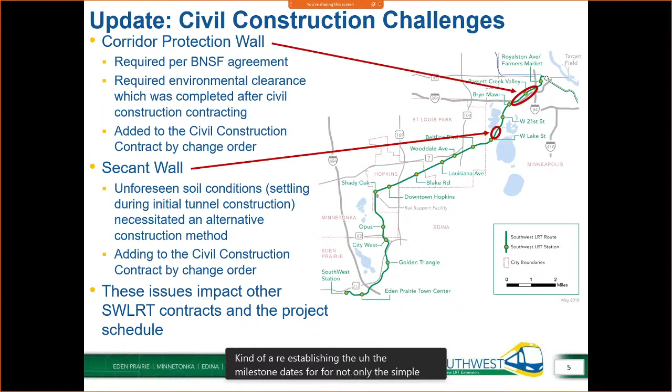So maybe you could advance the next slide there, Jason, slide 6. As I indicated, the corridor protection wall, we have completed a change order that was done earlier this spring, and so that work is underway. I have a photo to show that. And then the secant wall, as I indicated, we're still working on that process.

But associated with the secant wall, we also need to reach agreement with the civil construction contractor on how they're going to resequence the tunnel construction. As you may recall back in February, the secant wall is an integral piece. It's not quite in the middle, but far enough within the tunnel itself, and that tunnel is about a half mile long, so the contractor really needs to resequence how they're going to do this tunnel construction. We still need to resolve that issue, given that we're in a very tight corridor with limited availability to access the construction site.

So as I indicated, we will need to still get through the secant wall and the resequencing, but the bigger lifts we have are we need to reestablish the schedules with the civil contractor and the systems contractors, and get that established before we can then set our sights on a revenue service date.

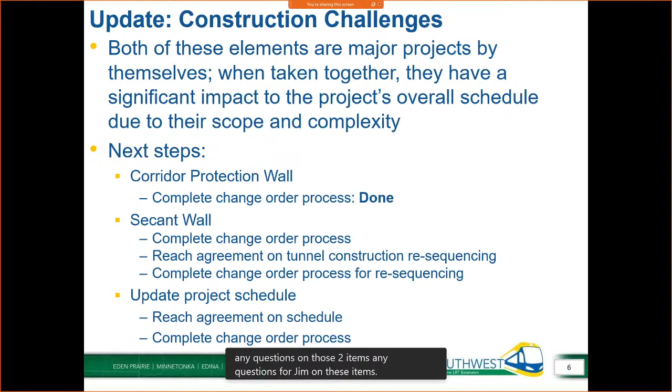So I have a number of slides starting from the west out of Southwest Station. We are making a lot of progress. If you haven't been out there, you might want to go take a look and follow the cranes and the bridges. A lot of stuff happening out there. This is a very complex site out of Southwest Station.

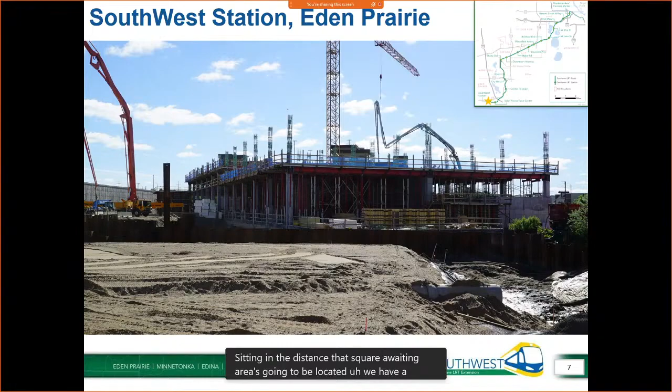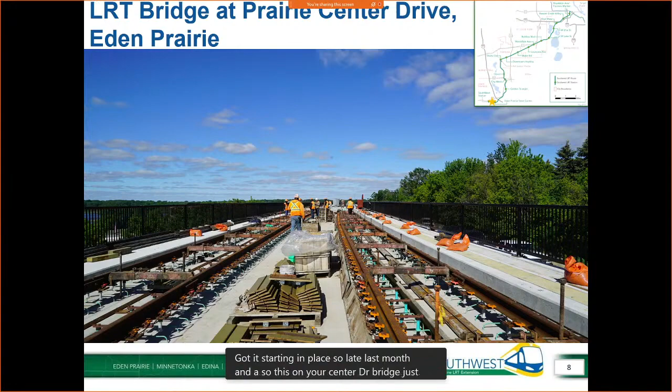Next slide, please. So this is our first LRT rail that got put in place late last month, and this is on Prairie Center Drive Bridge, just east of the Southwest Station. So we're excited about that happening.

Next slide. So station work in Eden Prairie Town Center is coming along well. You can see some good shape developing there in terms of the station itself. Next slide.

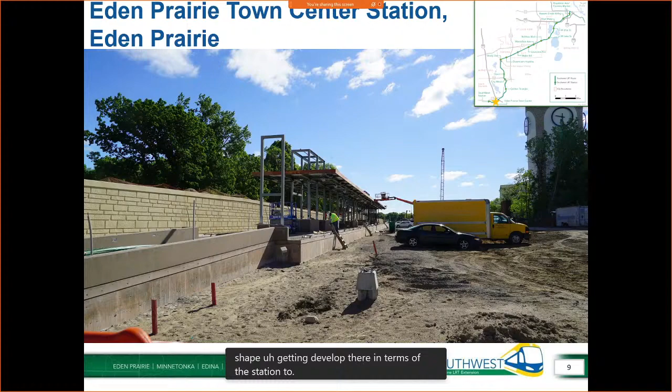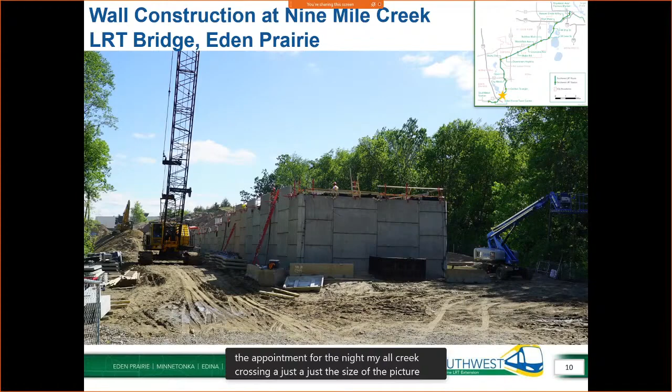Next slide. If we get into the Golden Triangle area, you can see some of the colors starting to happen with some of the stations. We did work with the 5 cities on color coordination for these stations, and it's coming along nicely.

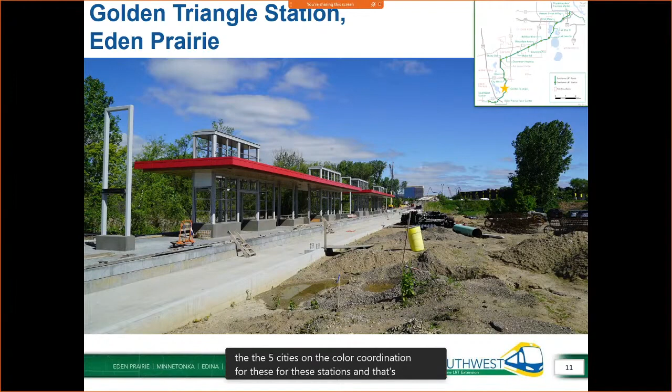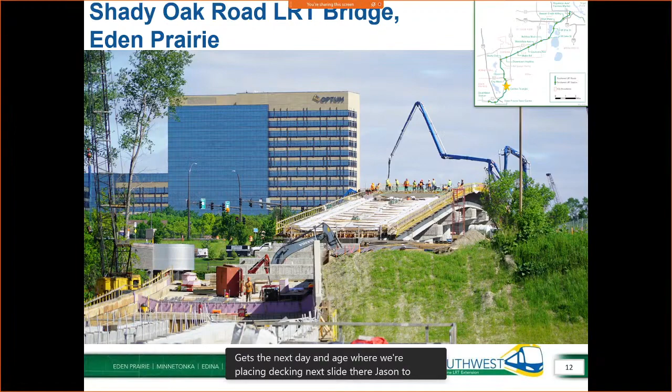This makes our way up to the city limits of Eden Prairie, Highway 62 off to the left there. This is the south segment, or west segment, of the 62 tunnel. It's coming along pretty well. You can see off in the distance there are a number of retaining walls being built to lead up to that tunnel. We have shifted the traffic.

Thank you, MnDOT, for coordinating with us on this. It's been a lot of disruption as we've had to move Highway 62 back and forth. We're looking to bring 62 back to its final location later this year, after this portion of the tunnel gets completed. This is about a 500-foot long tunnel that'll be under Highway 62 to carry the LRT trains.

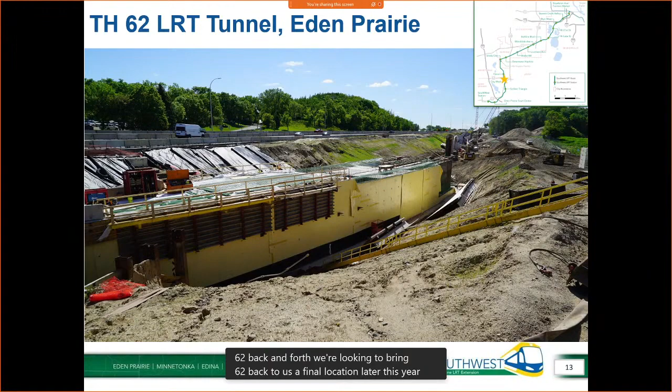This is Opus Station. Just to get you oriented, off in the distance is where the cranes are - that's where 62 is. You can see Optum's tower off to the right. This is the station itself.

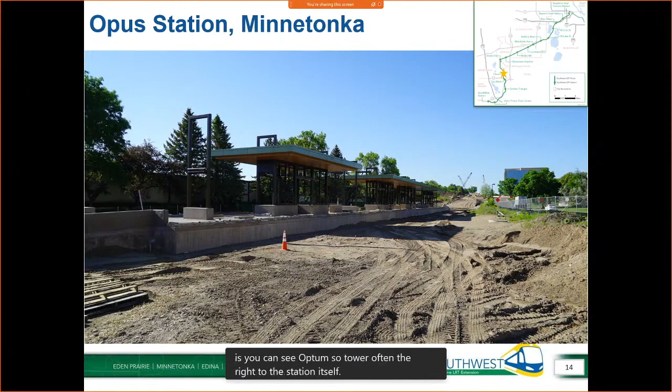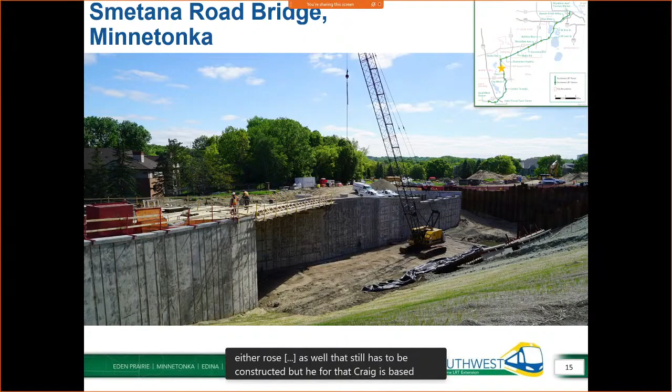That's on a bridge as well that still has to be constructed, but where that crane is based, that's essentially where the LRT is going to go through and under that bridge and make its way onto the long bridge over the wetlands - about a 3,000-foot long bridge that's well underway at both ends of the project.

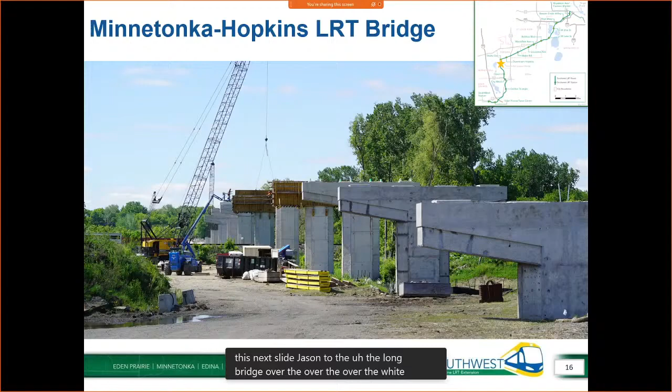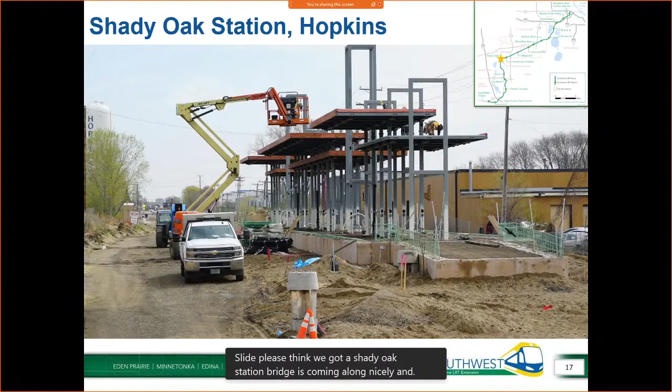Shady Oak Station Bridge is coming along nicely. It's at the western end of Hopkins.

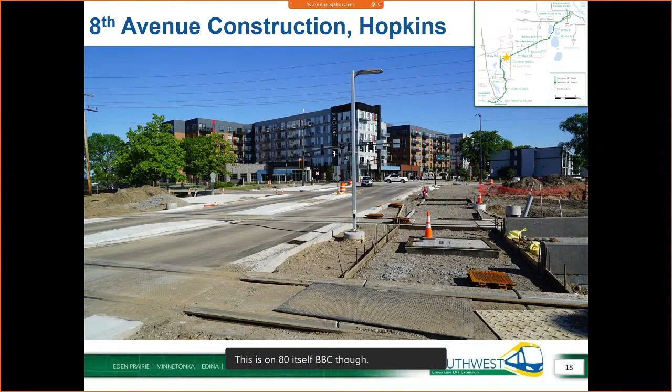This is work we just finished doing - some new concrete work in the intersection of 8th Avenue and Excelsior. This is on 8th itself. You can see the track crossings just off to the right, where the downtown Hopkins station is.

So there's downtown Hopkins really taking some shape there.

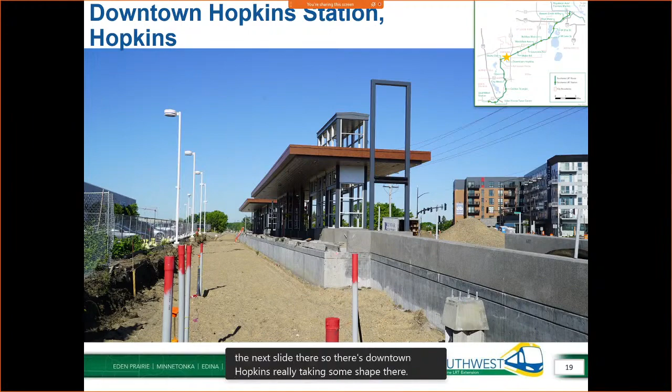We have about a 400-foot span that has to go over the railroad track and over that diagonally crossing roadway, to take the LRT up and over those two functions.

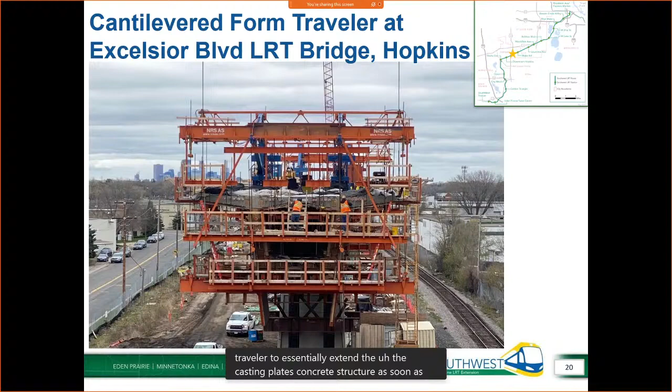These are the workers working on this, what's called a form traveler, to essentially extend the cast-in-place concrete structure as they move from one pier to another. The next image shows an interior view of all the intricacies of what's going on there - very detailed construction. They have to pre-stress the bands in there to make sure we have a strong, secure structure to carry the LRT.

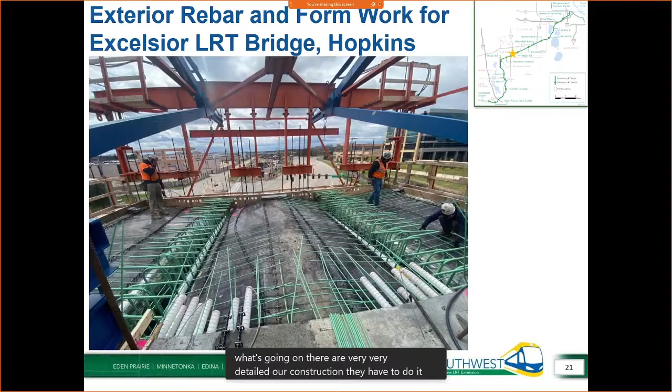We gave a tour last month with Three Rivers. We had some City of St. Louis Park folks along with us. This is down on Blake Road for the trail underpass, where we have the west segment completed and contractors working on the east segment right now.

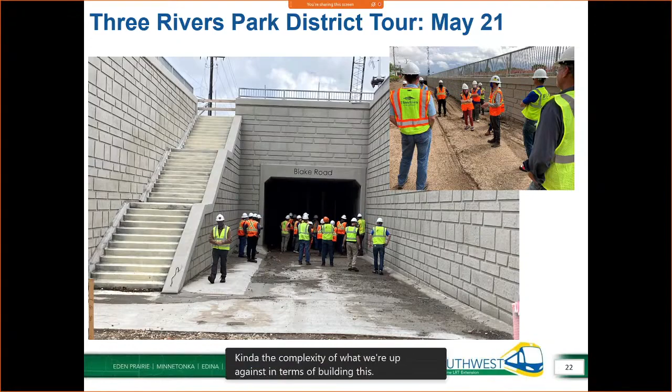We put out a notice to do some tours, and those filled up pretty quickly. We're going to be looking to do some subsequent tours later this summer to show what's going on. I think it was helpful to show some folks - we had a couple of commissioners from the board there to show the complexities of what we're up against in building this project. I think folks got a good flavor for that.

Not much to see here in terms of just a lot of dirt, but there was a pretty extensive soil improvement program here. We had some very soft soils that we had to remove and replace. The station platform is going to be located here, where you see off in the distance some sheet piling under the railroad tracks off to the right.

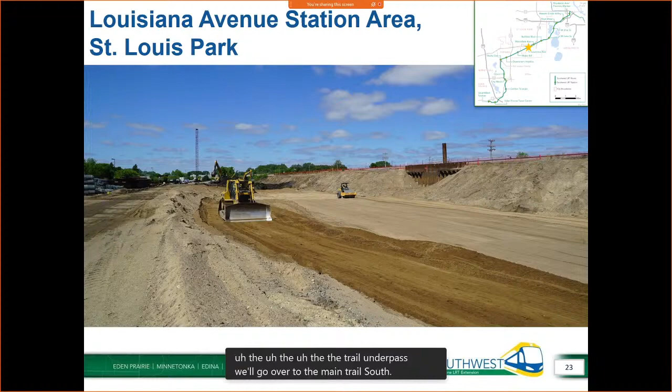That's where the trail underpass will go over to the main trail, South Cedar Lake Trail, that runs along the tracks. And so that's getting well underway.

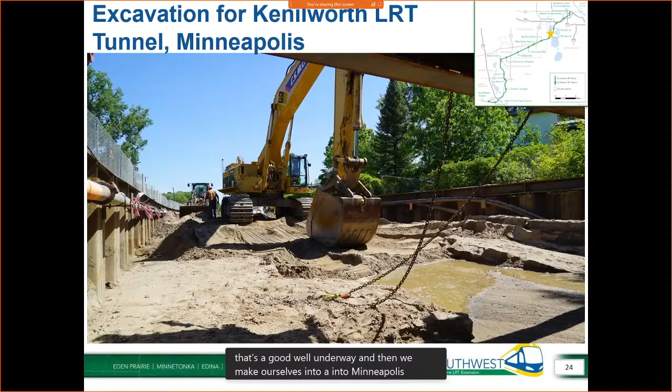And then we make ourselves into Minneapolis, where the Kenilworth LRT tunnel is just excavation in process for that tunnel.

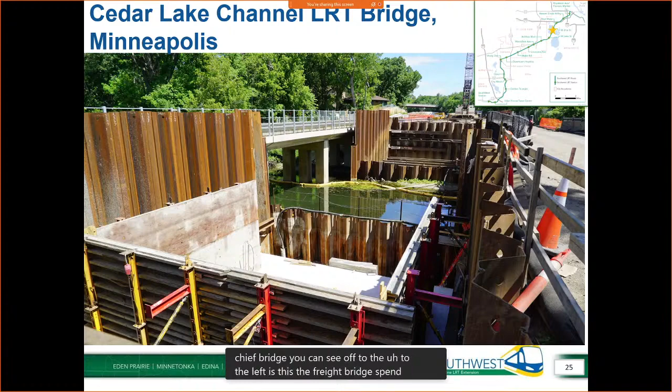This is the Cedar Lake Channel Bridge, just north of that, where the abutments are in place for the LRT bridge. You can see off to the left is the freight bridge that's been constructed, and off to the right is the existing trail bridge, which will eventually be replaced with a new pedestrian bridge.

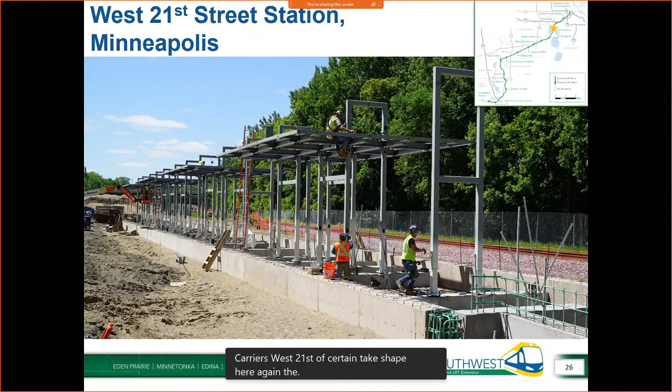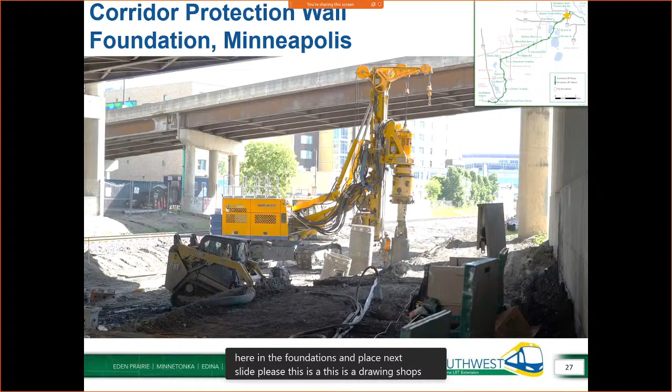This is the drilling shafts for the corridor protection. We have a number of these shafts to do, and the contractor is well underway with that work. Quite a bit of work to do yet though on this piece.

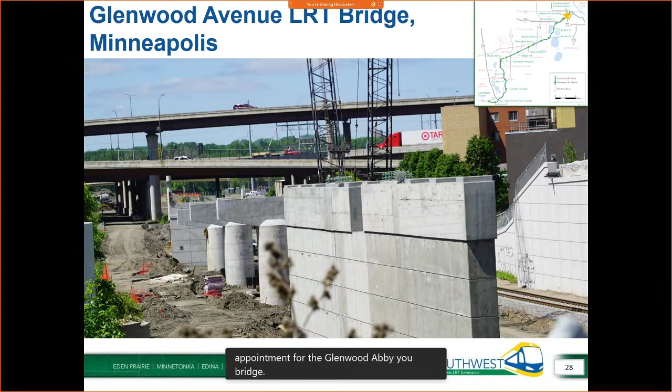It's under I-94 there, and then just off to the east from there is our structure that will carry the LRT out of the freight rail corridor and up into the Royalston area. You can see just off to the right is an abutment for the Glenwood Avenue Bridge, and pier for that bridge as well. So that work is well underway here.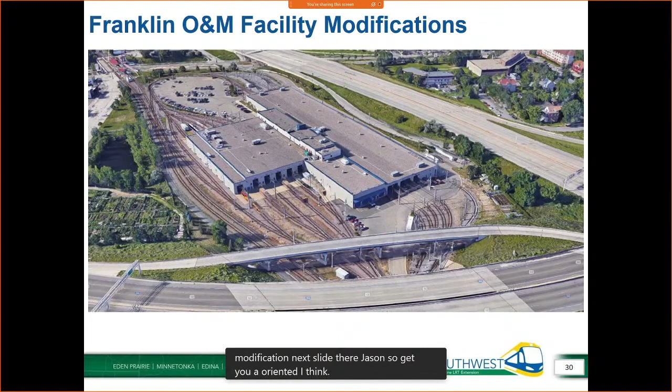So we have some other work going on, the Franklin O&M modification. Let's get you oriented. I think I've shown this in the past, but this is the existing facility before we started doing construction. This is what it's going to look like when it's all done.

We're essentially expanding the maintenance facility to the north in that lower circle there, and that next piece right to the right of it is our rail control center up above the maintenance facility.

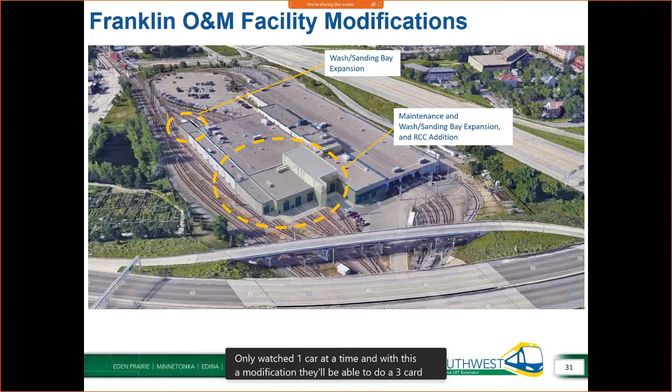We're also expanding the wash/sanding bay, where the operations folks currently could only wash one car at a time. With this modification, they'll be able to do a 3-car consist, which makes maintenance and just getting oriented much more easily done.

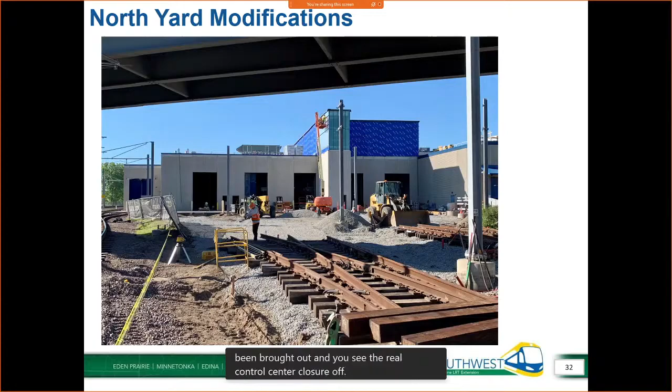So here's a couple of images of what things are looking like out there. This is kind of looking south at that north end, called the North Yard, where that maintenance facility has been brought out, and you can see the rail control center enclosure up above. And a lot of track work underway to get trains into the facility.

We've had to do a number of modifications. So very tight site, we kind of had to work with what we had here. We're able to utilize this space to store about 11 vehicles that normally we like to have stored inside. So there's going to be a management issue that operations will have to be faced with. But we kind of had to do what we had to do to make things fit.

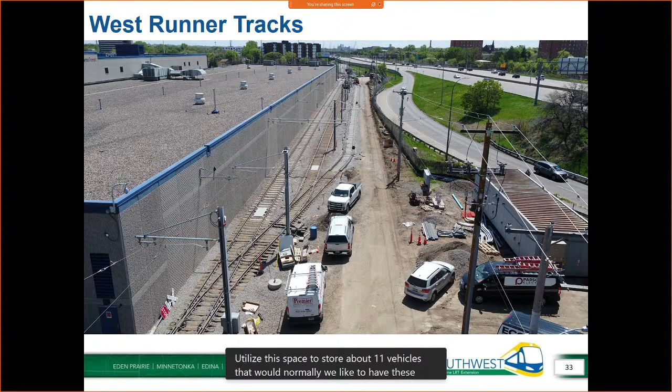As we're adding 27 vehicles to that site, we need to have additional power to manage those additional vehicles. And so this is the housing of that traction power substation.

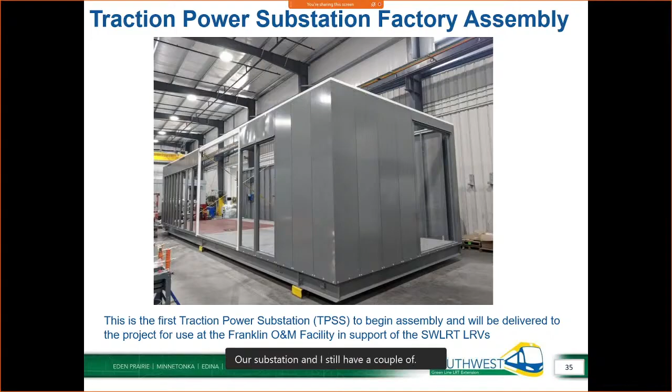And I just have a couple of images of componentry. This is just some componentry that goes into that. You can see all the electronics here, very sensitive equipment.

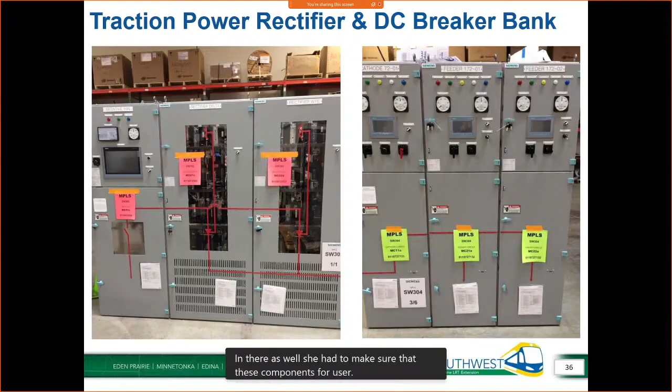This will be inside the traction power facility, which has air conditioning. It has heat in there as well. So you have to make sure these componentries are in well and good working order. So it needs conditioned space.

And then the next slide is, I think, another first article item for signal processor. Just kind of get an idea. It's just a lot of electronic gizmos here that we need to operate the system.

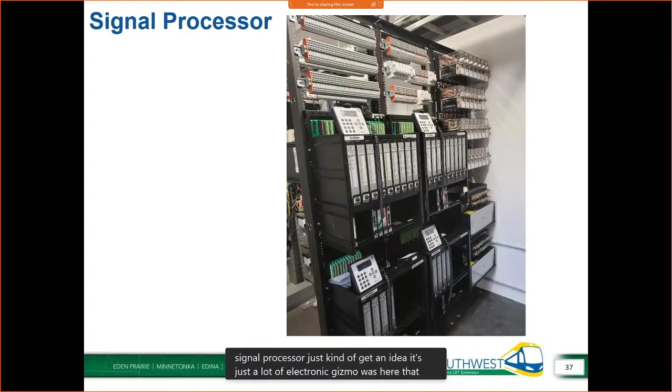Yeah, thanks, Jim. Pictures speak a thousand words. That is really impressive to see the amount of work that's been done. And thanks for focusing in on those complicated areas. Any questions for Jim from anybody?

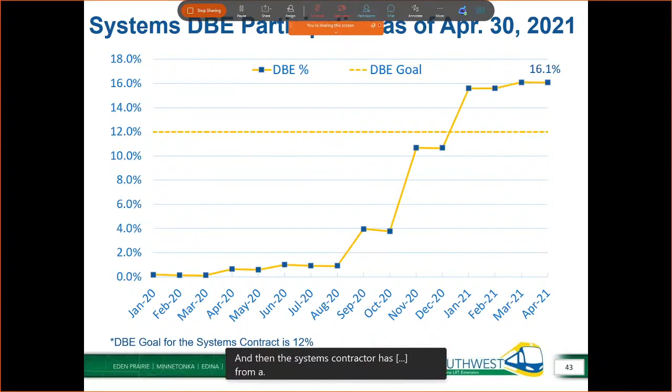Slide 43. The systems contractor has a DBE firm working on the stations where the civil contract is far enough along and is permitting them to work. You can see in some of the pictures that Jim shared there was some work on the light rail stations. Slide 44, please.

Mr. Chair. Yeah, go ahead. So are we going to look at the disaggregated data in more detail on the contract side as well?

John, you can go ahead. Yep, so for the disaggregated data, if you have questions, I can answer them. Otherwise, I can make sure that we include some of the slides next time and make it as a part of the presentation.